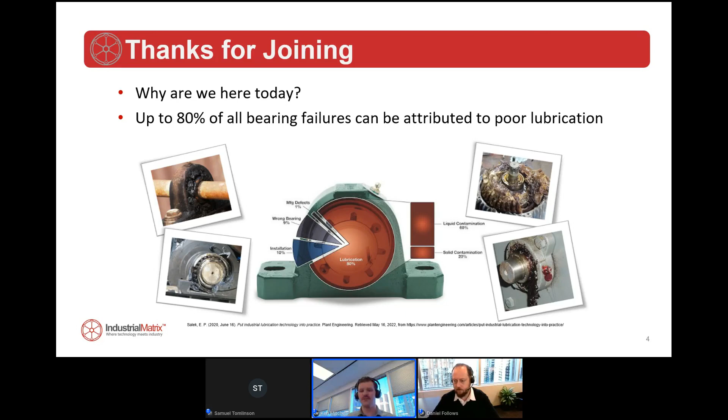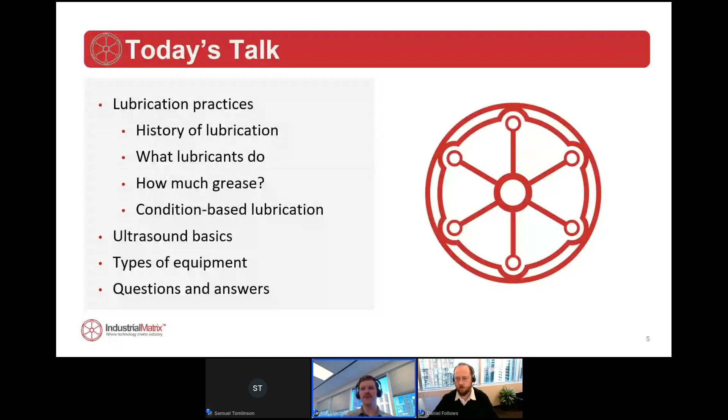So for today's agenda, I'm going to start by talking about lubrication practices. We'll take you through a brief history of lubrication, what lubricants do, and how much grease goes into a bearing - that's the age-old question. Then we'll build on that and get into condition-based lubrication, where we can really justify how much grease we're putting into a bearing. We'll tie that in with ultrasonics, because that is a very important and critical technology for diagnosing and analyzing how much grease should be in a bearing. Then I'll get into some types of equipment, just to paint the picture of what's out there and how the industry is accelerating and growing the options we now have to grease based on condition. Finally, we'll end with questions and answers.

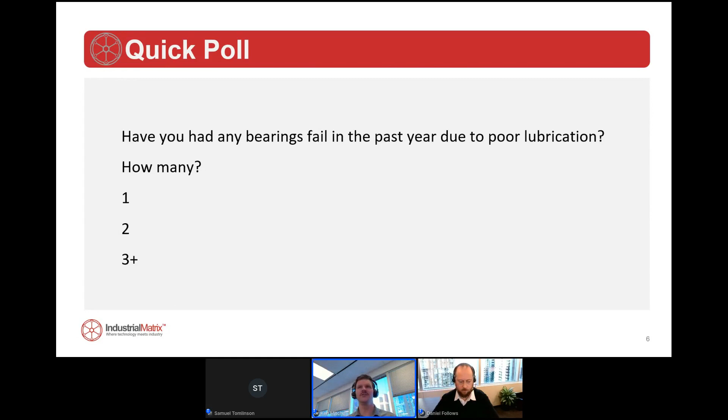So lubrication practices - again, we'll go over a history of lubrication, what lubricants do, how much grease goes into a bearing, and finally condition-based lubrication.

I want to start with a question, and I always like to tie this into an analogy and tell a little bit of a story. So my question for everyone is, how much water should you drink in a day? Well, experts say we should drink anywhere from 6 to 8 glasses each day. Now, those needs can change. What if we're outside on a humid 90-degree day, or 30 degrees Celsius, running a marathon? How about if we're sitting at our desk like we are now, attending a webinar? The point is, bearings are like us - their needs change depending on their environment and their workload. The harder they work, the more they need, just like our bodies and how we nourish ourselves. So keep that in mind as we go through this.

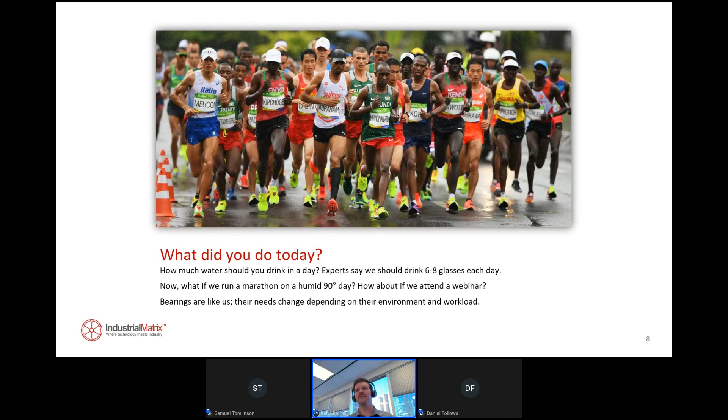Let's start with lubrication practices. Rewind the clock many, many years ago - BC, 17th century - the Egyptians got out there and started to build pyramids and structures. They realized that if they put stones on their sleds and slid them, it was really hard, so they needed a friction modifier. And they utilized olive oil - they'd pour that under their sled and could slide it along.

And that was really the first instance of lubrication that we had in our world, where we could use some type of a medium to really reduce friction, dissipate heat, reduce wear. Fast forward about 3 centuries, and the ancient Romans started to use animal fat to lubricate the chariot axles. If they didn't, they would heat up and fail.

They also realized that they could spin a lot quicker. Now, fast forward many years later into the 1850s and into the 1920s, petroleum oils are developed, and they really become the industry standard. Somewhere around the 70s, we started to get into synthetic lubricants, which is kind of where we live right now.

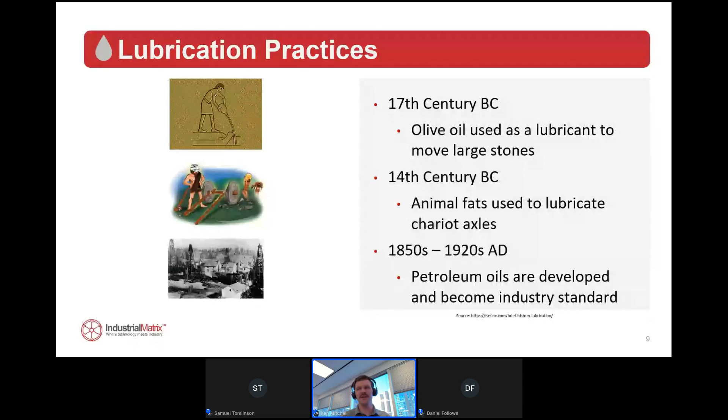But we've been increasing on this, and the whole goal is to dissipate that heat and to really fight friction and reduce wear. So that is the 3 things that lubricants are designed to do, as well as prevent corrosion through the addition of additives.

So what is grease comprised of? We have 3 basic compounds: a base oil, a thickener, and an additive. And what happens is, as we replenish grease into a rolling element bearing, we're going to start to use up that thickener. The base oil is going to deteriorate. The additives are going to be consumed.

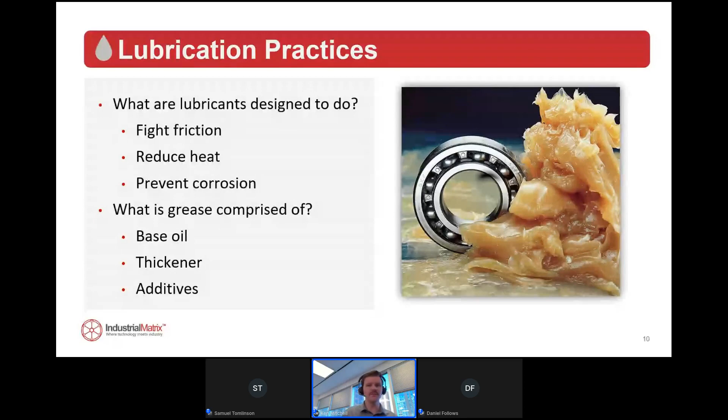So we need to regenerate that process on a set schedule. And then the question becomes, well, how much grease and when do we do that? That's really what we're going to get into. So to start with everything, if we have the best equipment out there, we grease based on condition, we're giving the bearing the right amount of grease that it needs, those things don't overcome bad lubrication practices. So we really need to start there as we build out a lubrication program and ensure that we're doing precision lubrication.

It starts with storage. When we get that lubricant in, where are we putting it? Is it sitting in an open drum off to the side of a lube room, maybe with the cap off, where we can start to get those contaminants in there? And then when we go out to our equipment, are we picking the right grease? Are we ensuring that if we're greasing a bearing, that that's meeting the OEM specs or the conditions that we're running that equipment under, if we need a high temp grease or a lithium based grease?

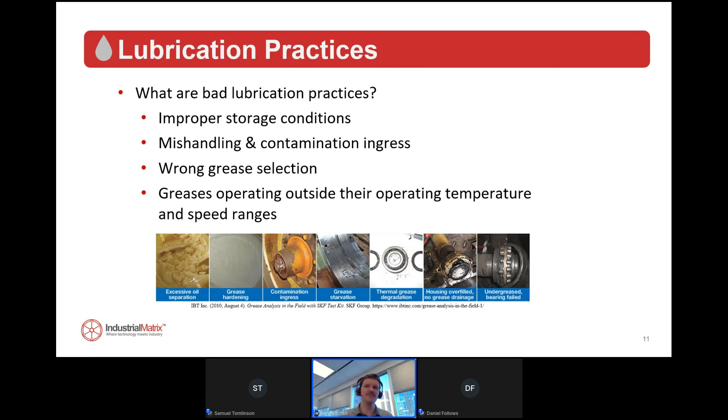And then finally, when grease operates outside their operating temperature and speed ranges, when we put too much strain on grease, it can't stand up to the job. So we really need to start by making sure that we're storing our grease properly, we're handling it properly, and then we're putting the right grease under the right conditions into our bearings. No matter how much we hone in and how much on condition based lubrication we get into, this is really where it starts, is proper handling.

So let's take you through a bearing. Well, what happens when we undergrease a bearing? That's pretty straightforward. We've all kind of been out there. We walk by a bearing, we can hear it rattling around. Yeah, that probably needs grease. It's getting due for that. Probably doing damage at that point in time.

But inevitably, when a bearing runs dry on grease, we're going to start to use up that thickener, that base oil, and that's going to result in metal on metal contact. It's also going to degrade the grease.

Now, just as bad as undergreasing a bearing, overgreasing a bearing can be almost as bad in some instances. When we overgrease a bearing, we're adding more heat, more friction. That bearing has to work a lot harder to fight through that grease and really do its job and rotate. We can also start to damage seals, introduce foreign contaminants, increase power consumption. These are all bad things that we don't want to do.

A good analogy I like to use is you're in the ocean on vacation and you're walking through the water and the water's up to your shoulders. It's really hard to get through that water. Now, as you get closer to shoreline and say that water's just up to your knees, you can just kind of skip right out. Think of a rolling element bearing the same way.

If we fill that up, that bearing's got to fill right up to the shoulders or right up to the top of that cavity. That bearing's got to work a lot harder to fight through it. Whereas if we just put the right amount of grease in there, that bearing can spin along smoothly and dissipate that heat and treat that metal.

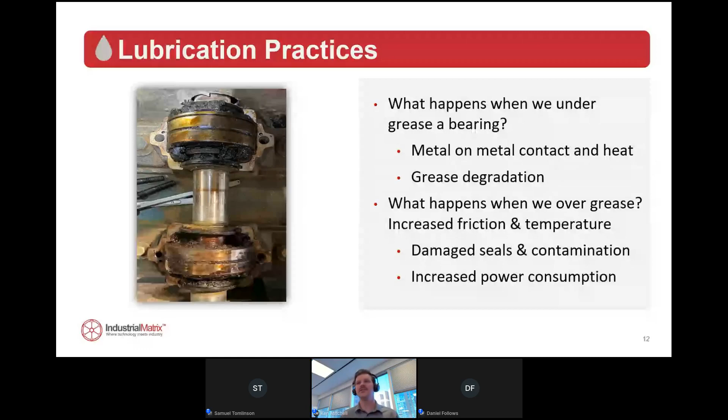So lubrication practices. Heard this before. How much grease do you put in that bearing? As I go into a plant or plants that I've worked in before, they say we give it 6 pumps every 3 weeks, or we give it 5 pumps every 4 weeks. So you really got to start to ask questions.

Well, what grease gun are you using? Because 6 pumps in one gun might not be 6 pumps in another gun. What if you have lubers on there, so on and so forth? How much is the output of that grease gun? Have you ever really checked it?

Are you using the same grease every time, or is the lube tech or the technician responsible for that grabbing one off the shelf and putting grease in because it's a bearing, any old grease will do, right?

Now, what if you're not running as much? If you've got downtime, or if you come through seasonal cycles, or what about if you're running in the summer when temperatures rise? Your grease consumption is going to pick up.

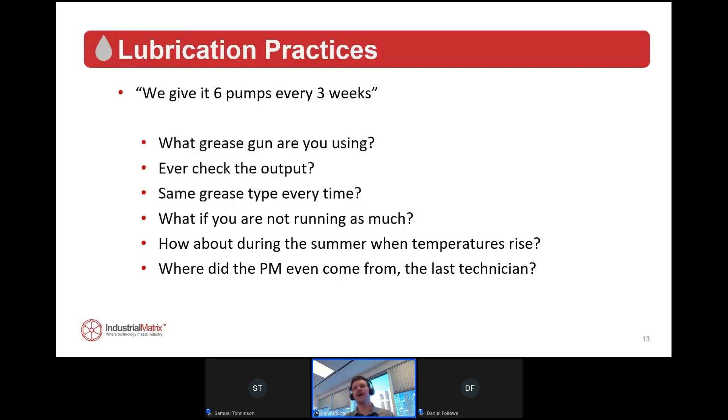And then finally, where did that PM even come from? Sometimes we go into the computer or we go to our PMs and say, okay, well, it's there, so it has to be right. We really need to start to question where we're getting this information from, and that's going to allow us to better grease our bearings.

So a couple more questions. Can we ever be 100% confident that we're adding just the right amount of grease? We know there's a sweet spot between under and over lubrication. And then how do we compensate for all these environmental conditions? Finally, what are the consequences of not adding the proper amount of grease?

Sure, the bearings aren't going to reach their L10 life, but that also contributes to reliability and uptime. A $300 bearing failing in the middle of the day might not be so expensive on the part, but what are the results of that?

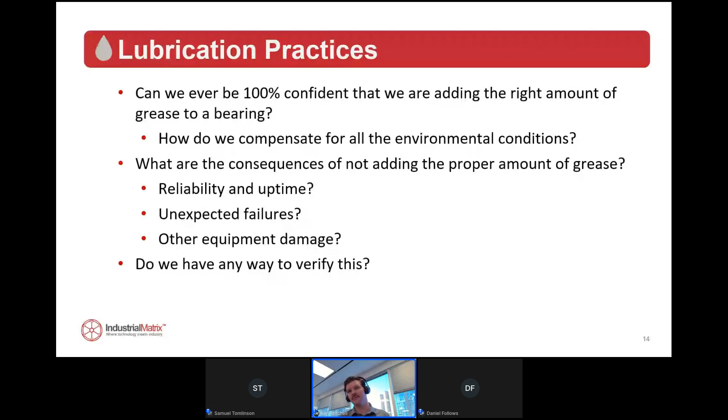Are we going to have downtime? Are we going to have to pull apart the machine? Is there going to be other equipment damage? Are we going to start to damage various other components? So we really want to have a way to verify how much grease we're putting in.

So back in the early 1900s, a gentleman by the name of Stribeck developed a curve known as the Stribeck curve. And this tells us the optimum lubrication status. Essentially what it is, is a point where friction is at its lowest coefficient. Outside of that ideal quantity, we start to increase friction, increase wear.

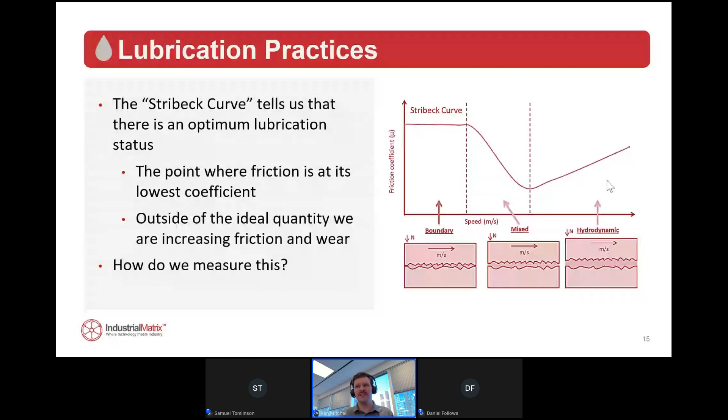And how do we measure this? How do we know that we're hitting that ideal spot every time when we go out to grease our bearings? Well, in the past, and for most OEMs, there's different calculators and formulas.

So SKF has a method. Based on the bearing dimensions, they'll tell you how much grease to put in the bearing, whether it's a side or an annular replenishment fill. And then the interval at which we grease a bearing, that can also be run through a calculator.

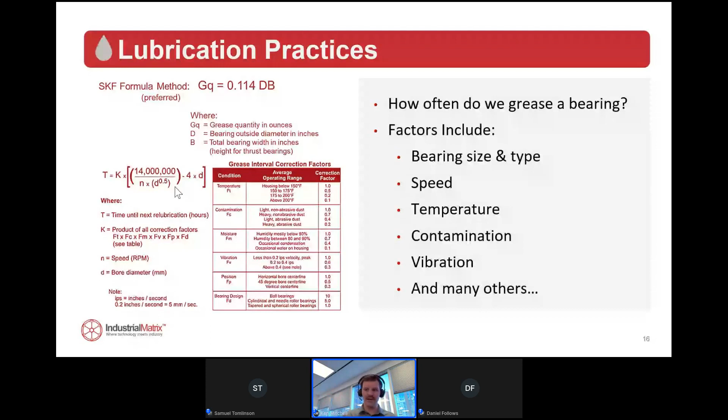Now, if we get one of those variables wrong, that's going to throw off the whole equation. So you can see it's not a fine science. We can't just take these numbers and start to spit them out and say, okay, we're going to grease that bearing every 2 or 3 weeks. We want a way to verify this and make sure that that bearing right here, right now, is getting the proper amount of grease. So what if we had the ability to do that?

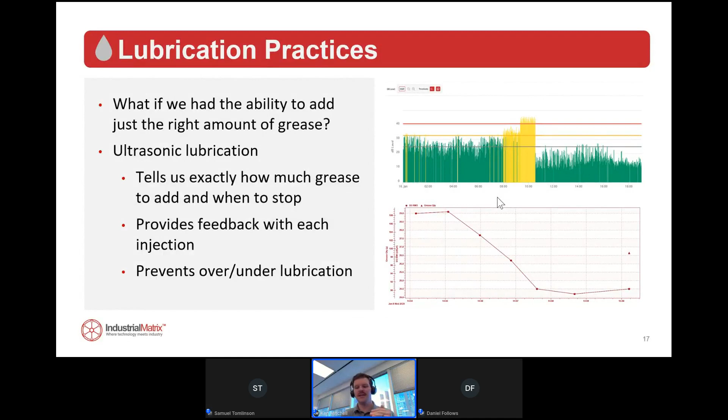So it greases, and that actually follows, if you notice from a few slides ago, that Stribeck curve, where we grease, go down, down, and as it starts to come back up, we're getting into that over lubrication status, or at least pushing our way towards there. We cut off lubrication. So this technology is really following what we've designed over 100 years ago and dictated as the lowest frictional coefficient.

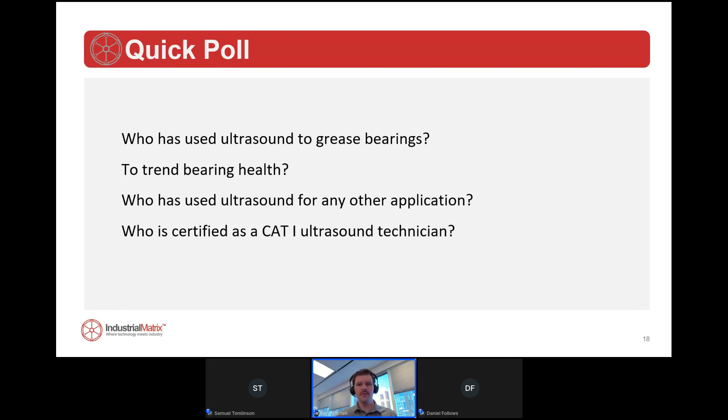Now, why ultrasound? Why do we want to use this technology? Ultrasound has quite a few benefits when we talk about monitoring assets. First of all, and we'll get a little bit more into it, the sound is very localized. Ultrasound working at this high frequency, the sound doesn't like to go out very far. We say it doesn't like to go out and play with others. It's very sensitive to small changes. It also gives us a perfect indication of what's going on with friction, also very repeatable, consistent, and some of the devices give us the ability to hear the injection.

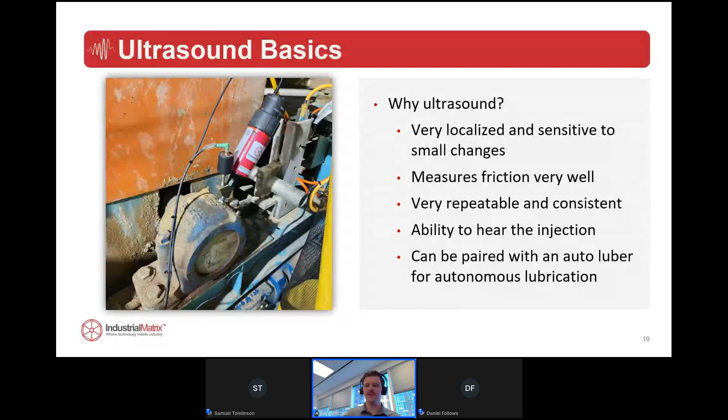So what happens when we grease with ultrasound? Again, we're measuring the frictional component, and we use a scale called decibel microvolt. When we add grease to a bearing, we're going to expect 3 things to happen. We want that feedback, so the dB levels going down is the first thing that can happen. Well, that's good, we're reducing friction. We're typically going to keep greasing until they rise back up again.

Or if the system's online, we're going to hit it with grease, expect to see those levels go down, and then come back up. Now, the second thing that could happen if we grease a bearing, the levels are going to go up right away. Well, in that case, we're going to stop because we know we're going in the opposite direction. We're increasing friction. We're not going to grease that bearing anymore, probably already in an overgrease status. And then finally, the third thing, what if the dB levels don't change? Well, there could be a lot of different factors. Maybe we're not adding enough grease to modify the friction level. The grease isn't getting to the bearing, our grease gun or our luber is empty, or another issue that's going on.

That is probably the most important thing we can get out of an ultrasonic system, because if we try to grease a bearing and we're not getting grease in there, we need to know that. Otherwise, what are the consequences? That bearing is going to run dry, metal on metal contact. It's going to fatigue the bearing and eventually fail prematurely.

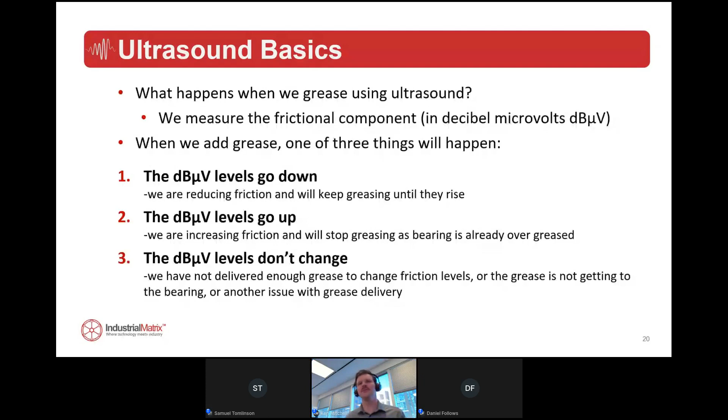So when we talk about ultrasound, where does it fit in? For those of us with experience in other condition monitoring techniques, if we've worked with vibration before, ultrasound really works in conjunction with other technologies, predominantly vibration. Where it fits in: looking at the screen, these are the 4 stages of bearing failure. As a bearing progresses through failure, it'll hit these different stages, and technology will tell us what's going on at each stage.

For stage 1, very high frequency - that's what we're going to detect with our ultrasound. Very minor subsurface defects on the bearing, and usually we can improve that with lubrication. So as that bearing starts to get loud acoustically, we can grease it back down. It doesn't mean the bearing's failing, it just means that bearing is in need of something.

Now, if we let that go, or if something happens to that bearing, we start to move into the progressive stages. Stage 2 is still high frequency, starting to appear in our acceleration and velocity technique. That's where if we pulled apart the bearing, we might see a little bit of damage or spalling in the race.

And then eventually the bearing's going to degrade even more if we leave it, getting into stage 3, stage 4. A good analogy I like to use is your car brakes. You're driving down the road one day, you hit the brakes, and you hear that very high pitched squeal. That's the early indication - your pad is worn down to a point where that little wear bar is touching the rotor, producing a very high frequency event. Now what happens if you leave that and don't replace your brakes?

Well, eventually you're going to get more pad wear down. You're going to get more metal on metal contact, and the frequency of that sound is going to start to come down in the audible range to a point where you get that metal on metal grinding - just this low rumbling sound. Same thing with our equipment: it's going to start at that high frequency squeal and then just come down in the audible range as the damage progresses.

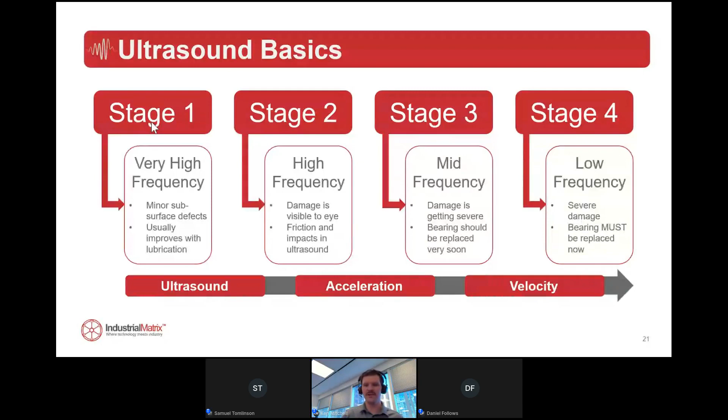If we look at the PF curve, I'm sure most people on the call are pretty familiar with the P-F curve. There's a lot of different iterations out there, but we really put ultrasound at the front. So after the installation and before the proactive domain, ultrasound fits in there because as a bearing starts to need lubrication, we can grease that out using ultrasound technology. It doesn't mean the bearing's starting to move into the failure curve - it just means the bearing's in need of something.

It also monitors the condition of a rolling element bearing. So if we're greasing a bearing, it goes up to a certain dB, we grease it back down. We go out next month or next week, or the online system picks up that it just keeps climbing - that's going to tell us the health of our bearing. So we use the tool twofold, as a technology for two different benefits where we can grease and monitor the condition.

Now, as we progress down the PF curve, this is where we pick it up in our vibration techniques. Going back to the last slide, we'll start to see a defect. If we find it in ultrasound, acceleration, velocity - eventually it'll start to create a heat signature. By the time a bearing creates a heat signature, it's getting pretty close to failure mode. And then eventually it becomes loose, your clearances go away, and then you do damage.

So you really want to deploy technology on the PF curve to find these defects before they become a real problem. If you're looking at stuff like heat, a lot of places will go out with a temp gun and shoot heat, but you're at the advanced stages of failure, almost in the failure domain, by the time you pick it up with heat. We say it's typical to discover a defect with ultrasound and then trend it to failure in vibration, heat, thermography, and other technologies, which is really true.

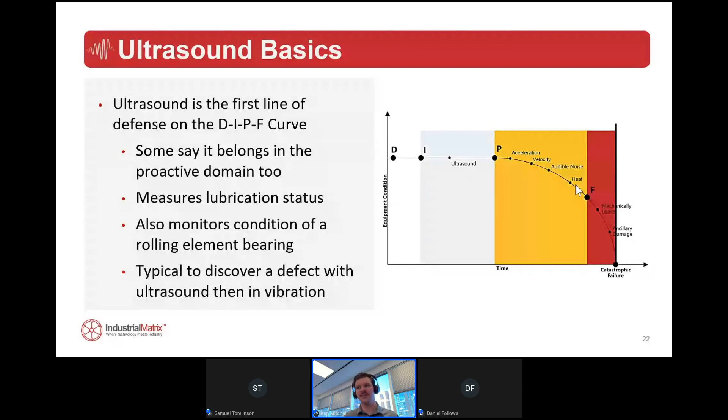It's that early indication and indicative of lubrication. So I'm going to talk a little bit about ultrasound. I won't get too in depth. For those of you interested, as you start to go down that road, I definitely encourage you to do your Cat 1 certification. This technology is becoming more and more beneficial outside of even what we're talking about today. But I'll give you a brief background and justify why we use ultrasound.

In our world there are 3 different types of sound. The first is infrasound, anything under 20 hertz, stuff we can't hear as humans but we can maybe feel. From there, 20 hertz up to about 20 kilohertz is the audible range, that's where we as humans live, breathe, hear. Now depending on your age, that 20 kilohertz starts to drop down, it can be down to 16 or 18. That's our entire environment. Anything above 20 kilohertz is considered ultrasound.

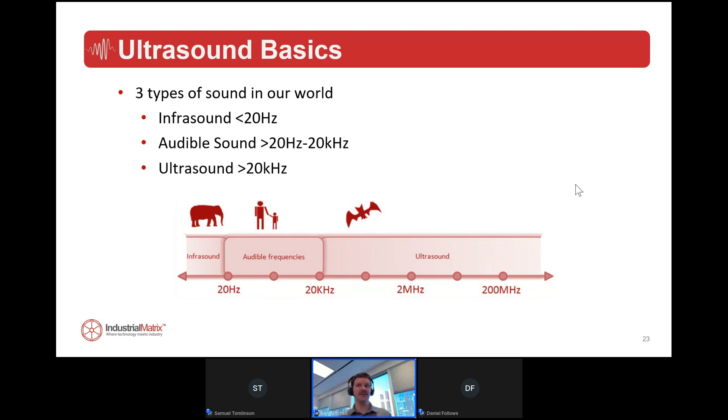So when we talk about these sensors, we're listening above that 20 kilohertz in the ultrasonic range. Ultrasound is produced by the vibration of molecules in any elastic medium, so that could be gas, liquid, or solid. It's airborne, structure-borne, it's all around us in that frequency range. We just can't hear it.

What we do with this technology is use the acronym FIT. If anything produces friction, impacting, or turbulence, we're going to detect it with ultrasound. When we talk about condition monitoring and lubrication, we're really looking at the friction and even the impacting, that's what the technology is going to tell us. But we can also use ultrasound outside of bearing health and lubrication.

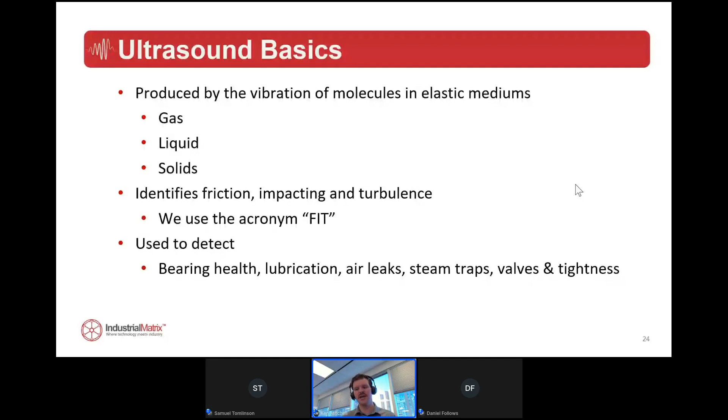It has been used for air leaks, steam trap monitoring, checking valves, and assessing tightness. That's where you can put a transmitter in an enclosure, seal it up, and actually scan around. If the sound gets out, then ingress can get in, meaning you're not completely airtight. So it's a very, very versatile technology, and it's really starting to progress in the past few years.

So what does sound do? Well, it travels as a wave, works over a wide range of frequencies. The behavior of the sound wave really does vary depending on the frequency. Sounds all around us can go through materials, reflect off them, and the amplitude increases or decreases with distance.

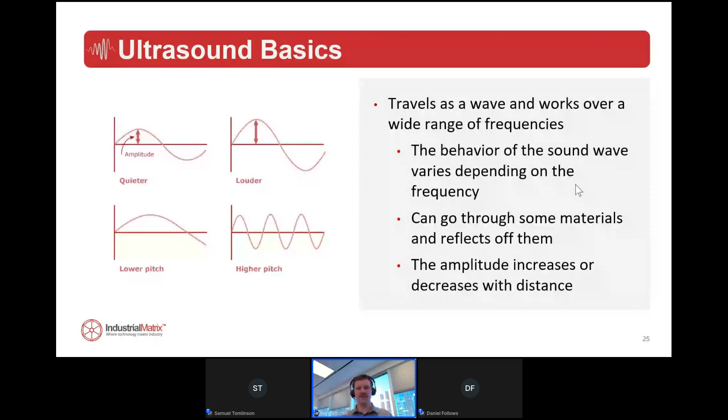If I'm speaking to you, if I'm 10 feet away or 3 meters away, and then I move up to 5 feet, so I halve the distance to 1.5 meters, I'm going to get twice as loud, my amplitude's going to pick up. Same as if I start to speak in a higher tone, the pitch gets closer together, those sound waves are going to come in closer. They're going to become more localized. So higher frequency means shorter wavelengths, lower frequency means longer wavelength.

Again, a good analogy - I always like to relate this to the real world. As far as music goes, you're sitting in your car at a stoplight with your windows up. The guy next to you, his windows are up too, and he's listening to his stereo at a very loud volume. In your vehicle, you're not going to be able to hear those high frequency notes, but you'll hear the low rumble, the bass, the boom boom boom.

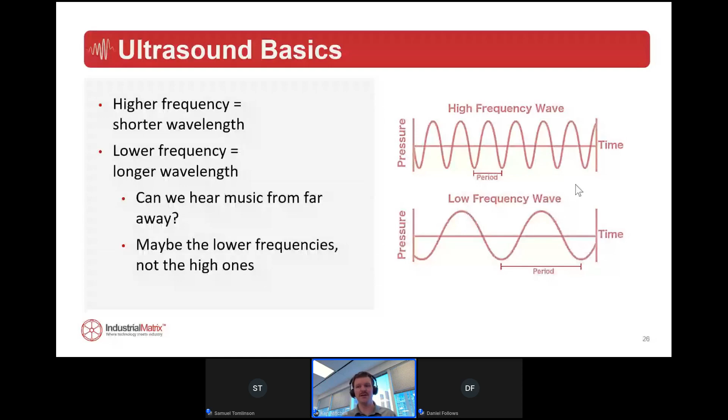The reason for that is lower frequencies travel a lot further. They can go through materials, they can disperse. The wavelength is a lot longer, so they can penetrate and have a lot more energy to travel further. Those high frequencies, though, become blocked out because as we move up in the frequency range, barriers can really block that noise, meaning it's far more localized. That's why if you blow a dog whistle in a room, if you're on the other side of the door, you might not be able to hear it, but if you start banging on a table at a low frequency, you'll probably be able to hear it.

How do we measure sound? Well, sound is measured in hertz, that's the international standard. For those of us in North America, we also use CPM, or cycles per minute. They're very interchangeable. So when we talk about sound, typically we talk in hertz, but when we get into vibration and diagnosing, we'll also relate to CPM. 1 hertz equals 60 CPM, just for those of us who need a conversion.

For comparison, my voice that I'm speaking at right now is around 100 hertz. What that means is the wavelength I'm propagating is about 11 feet in length. So there's a lot of difference in the wavelength as we move up in that frequency span.

What that equates to is when we take an ultrasound sensor, put it on a bearing, drill and tap it, magnetize it, epoxy it, we're only really measuring within about a 1 foot or 30 centimeter diameter. So unlike vibration, the signal is really unaffected by events further away. If there's something going on further down the machine or on the other side of the motor or the pillow block, the ultrasound's not necessarily going to pick it up as it reads that particular bearing. It's just going to focus on what's in front of it.

Again, a quick chart just to bring that point home. I said I'm speaking around 100 hertz of frequency, my wavelength is 11 feet. If I go lower, the wavelength gets a lot longer, and higher up in the frequency spectrum, all the way up to 38 kilohertz, it's only about 0.3 inches, so very small wavelengths.

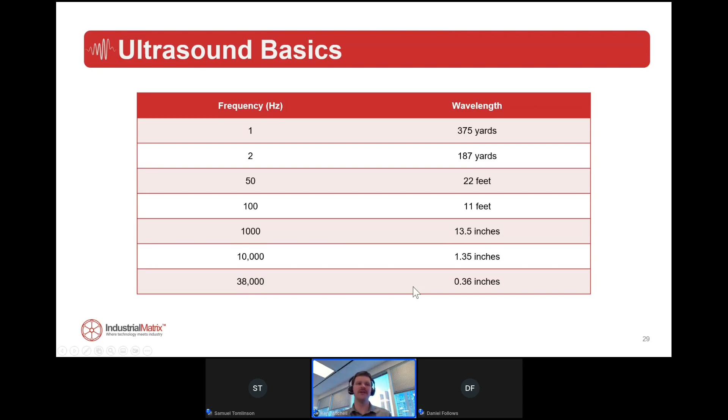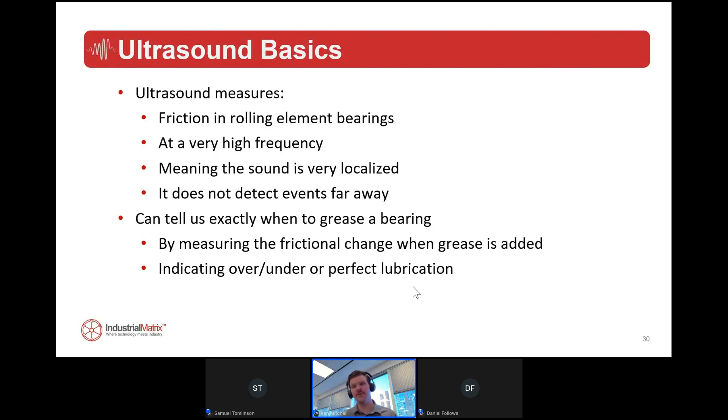So what does ultrasound do? It measures friction in a rolling element bearing, again at very high frequency, meaning the sound's very localized. Events far away, it's not going to detect well. What that's going to do for us is tell us exactly when to grease a bearing. We're measuring friction, and when we add grease, we're measuring that frictional coefficient, which indicates if we're under or over lubricating, or giving perfect lubrication to our bearing. That means we're giving our bearing that nourishment exactly when it needs it.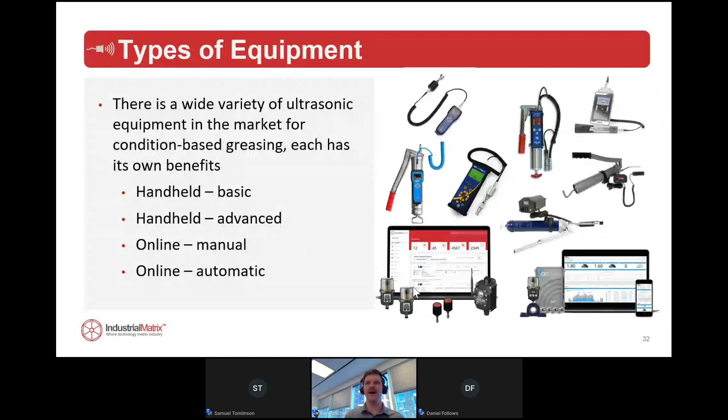To bring you back to the first slide, just to close off, I'm going to talk about some different types of equipment, to paint a good picture of what's out there, because there's a wide variety of ultrasonic equipment on the market for condition-based greasing. Each has its own tangible benefits and disadvantages. There are 4 different options: handheld basic, more advanced, online manual, and online automatic. Let's talk about some of the basic ultrasound equipment.

If you've ever seen a technician out there greasing with ultrasound, typically they strap it onto the grease gun. There's ones by SKF, SDT, UE, Sonophone, and some other manufacturers as well. What they typically do is work off-route. There's no software associated; what you see is what you get.

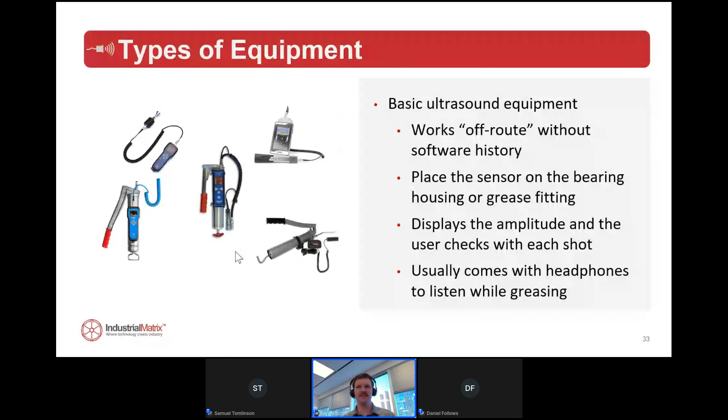As you put that sensor onto your bearing housing, or if it ties into a grease adapter, you can pick up the ultrasonic through there and put it on the grease fitting. It's going to display on the screen either a digital readout, or some have bars on them, and every time you add grease you're going to look at if the numbers go up or down. They usually come with headphones too, so you can listen to that bearing taking the grease as you put it in. So very basic, easy to use — open the box, take this equipment, go out, start greasing bearings with it, and you're going to justify what you're doing.

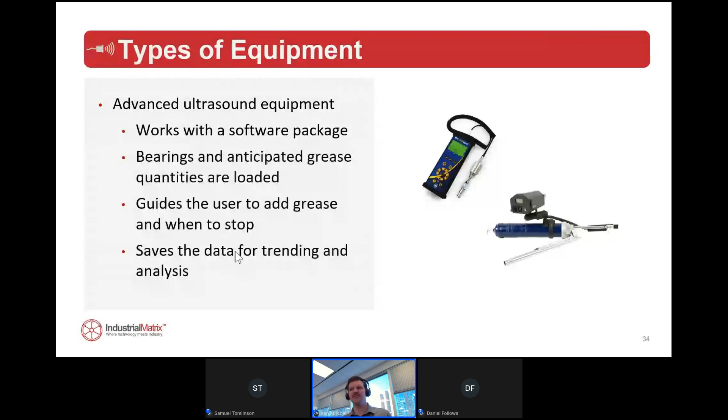Now we take that and build off it. There's some advanced ultrasound equipment. What this equipment does now is work with a software package. We can load in bearings, anticipate grease quantities that are loaded, and some will even guide the user when to grease and when to stop — it'll say grease, then tell them when they've had enough. All of this data is saved, and you can go back to the computer, plug it in, export it, and trend and analyze what you're doing with your bearings. So it takes the basic equipment and introduces the data logging or the ability to analyze what's going on.

And then finally, online systems. These are really the newest technology to come to market as far as ultrasonic lubrication goes. What they do is provide real-time monitoring. They're going to give you lubrication status and bearing health, and they'll communicate with auto lubers. So instead of the human intervention where you have to go out and visit that bearing with a portable ultrasound instrument, these will automatically grease, or they can trigger a manual lubrication, and they're going to give that bearing grease exactly when it needs it.

If you're doing a lube route with your ultrasound every 4 weeks, that bearing might get dry by the time you get out there. These type of systems will always be listening to the bearing and give it grease the exact second it needs. We say it's the first iteration of a bearing repairing itself.

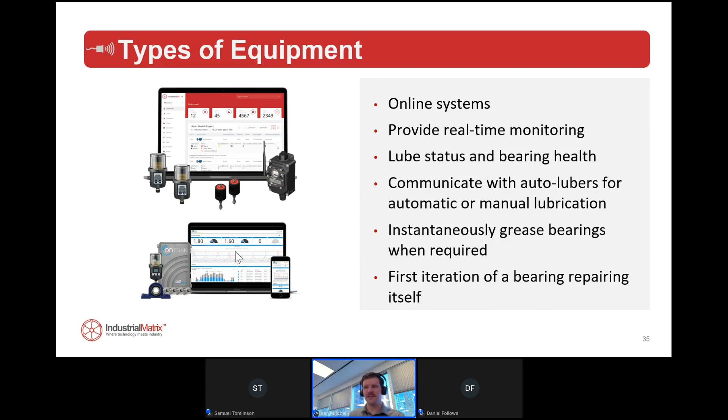Here at Industrial Matrix, our product line is called the LubeMatrix, and this is where we take the ultrasound and pair it up with an auto luber. We utilize radio communication for very high portability, and we'll dashboard that online with browser-based software. Once we set the system up, it is very autonomous. It's going to be greasing these bearings with or without human intervention.

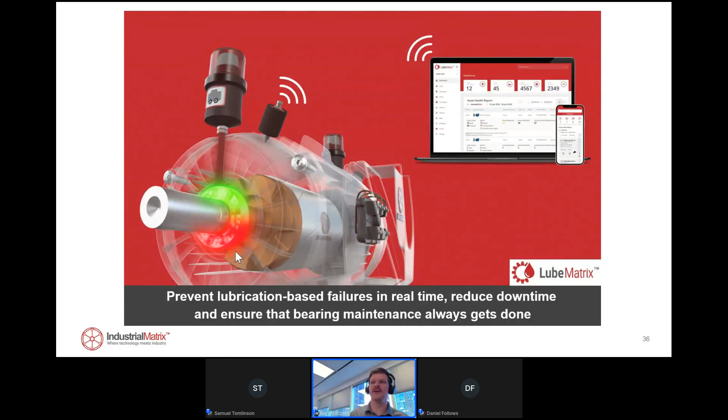All you really have to do is configure it, and then you'll check in on that bearing every so often. Now, how does it work? On the PF curve, we hit the ultrasound there. We have the sensors and the lubers installed, communicating via radio frequency up to the cloud.

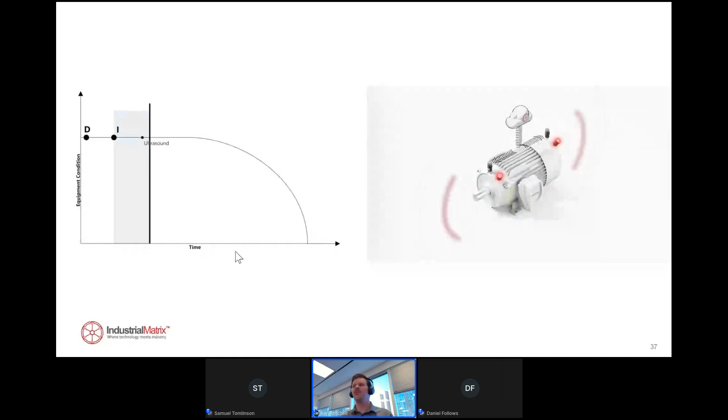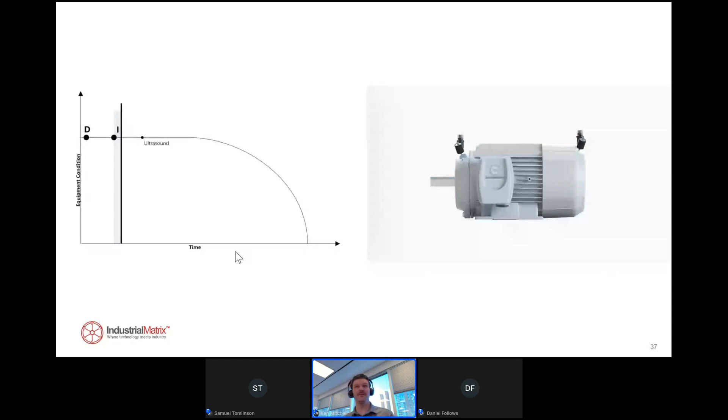When that bearing starts to run dry on grease after we've baselined it, it's going to call for lubrication. We're going to program and get that auto luber to fire, delivering enough grease to settle that bearing back down to baseline until the next episode. So if we're greasing a bearing every 4 weeks, for example, we might grease it every 3 or 4 days, but just a little amount every time that it needs it. That's really an early iteration of a bearing repairing itself.

So now we're starting to take the human factor out of it. We configure it, set it up with a baseline, and the luber's doing the work. We're also getting feedback in the system.

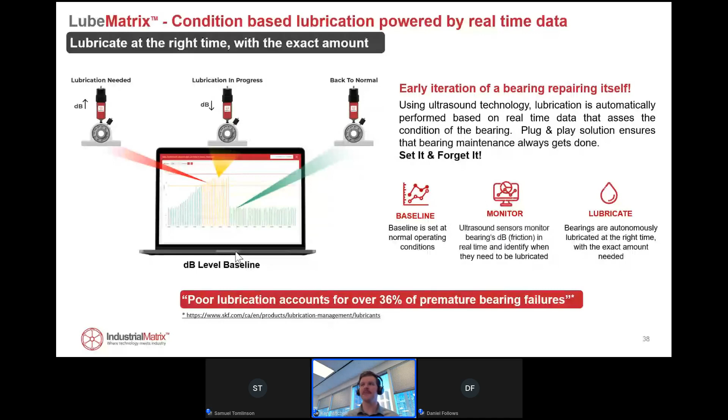So what are the benefits? Obviously the convenience, right? We don't have to go out, we don't have to grease bearings, we don't have to have a guy with a grease gun. It really is an ideal solution for remote, constricted assets, stuff that we can't necessarily get at, but the cost of failure is quite high. The cost of failure - we want to reduce downtime.

That's where we tie in precision lubrication. And then from there, we're going to help to create ROIs and show how this technology is going to help you reach that L10 of your bearing.

We can scale the system up as well. We can get up to 100 bearings on a single controller. Line of sight using radio frequency is really good - we're almost 10 kilometers line of sight. Realistically, it's going to be less as we get stuff in the way, but it's very far range, a lot better than Bluetooth or Wi-Fi in some instances.

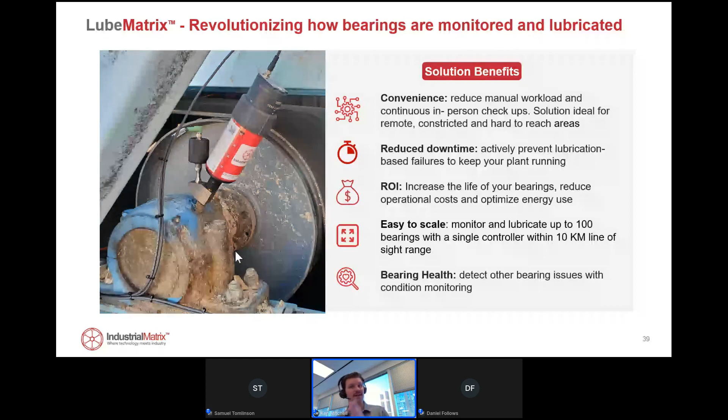And then finally, not only are we greasing, we're also trending bearing health as well. So when that bearing finally does start to fail, we're going to have indications for that.

What do we do as far as the LubeMatrix system? Well, we have two offerings. The first one is a single point lubricator. What we can do is tie two ultrasound sensors into one single radio. We also tie in two lubers. Very portable - we power the radio, and then this will send it back to the main controller.

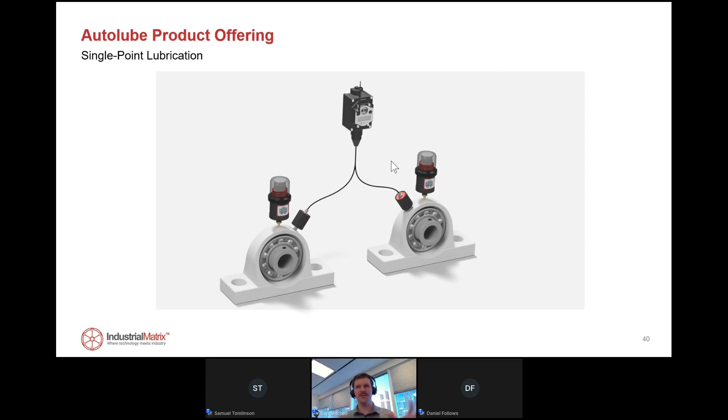So if we're in a plant and we want to monitor one pump down the way, and we want to monitor a fan up on the roof for the LubeMatrix, we have the ability to do that because we can modulize the system and move it around. It's not all hardwired back into one main system or one main box.

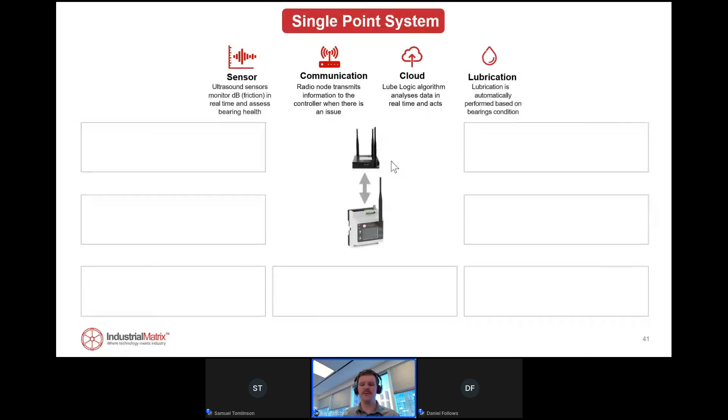What does the infrastructure look like? Well, we have a main receiver that connects to a Wi-Fi router with a global SIM card. So we use cellular to send it up to the cloud. That's going to come in a small enclosure. From there, we can get up to 50 radios on one controller.

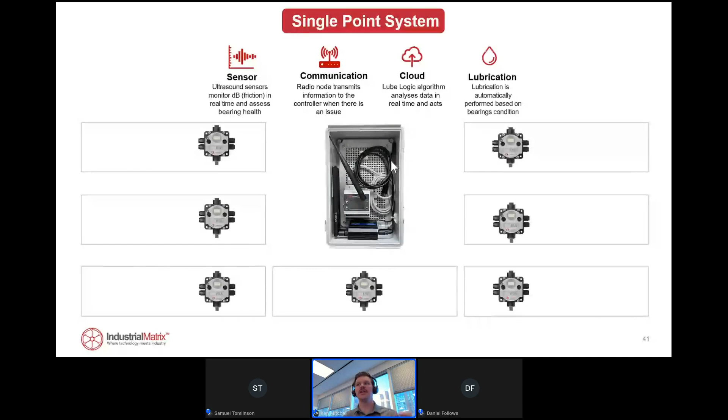If we go above that, we can just add another controller. And then each radio will speak to two ultrasound sensors and two lubers. And then finally, we can also tie into a multi-zone system.

I'll play this animation. Say we're listening to all four of these bearings with ultrasound. Just that second one from the left starts to rise up, indicating the need for lubrication. We can then install these brake valves that will open up, deliver lubrication to just that one bearing, settling it back down to baseline and not greasing all the other bearings in tandem.

Typically with a central lubrication or multi-zone lubrication system, it's just going to push grease blindly to these bearings. Now we can add some science behind it and make sure we're not over-greasing some, under-greasing others, because again, bearings' needs change depending on their workload and their demand.

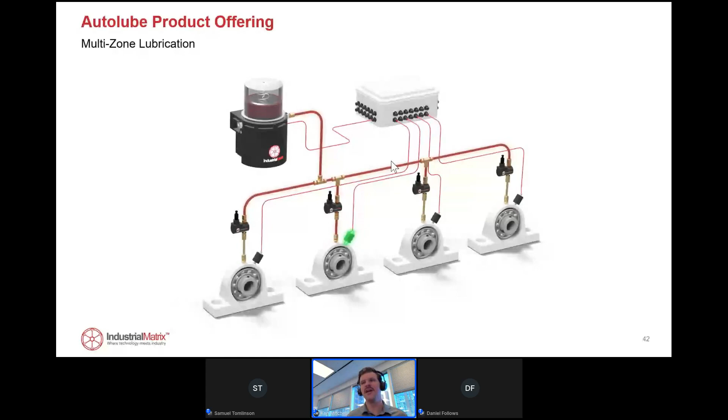So we take the LubeMatrix and marry it up with what we call our asset matrix. When we configure a system, we'll design an asset card for each particular piece of equipment that we're putting Lube Matrix on, and then we'll start to dashboard certain metrics.

We're obviously alarming around the bearing, so if that bearing moves into failure, we're going to get alarms. We're going to get warnings as well, and then even critical alarms.

And then we'll start to trend things like how much grease we put into that bearing, how many times we've lubed it, if we've had successful lubrication. Say we grease that bearing and it doesn't grease successfully, we'll return an unsuccessful lube and send a notification. So it really is full accountability.

As you can see on your screen, even little things like keeping track of how much grease is left in the luber. For anyone who's ever worked with auto lubers, they know that sometimes they run empty, nobody checks on them, and you have an empty auto luber sitting there for days, weeks, months. We're going to keep track of that.

When we fire grease into that bearing, we have the ability to feed back from that luber. So we tell the luber to grease that bearing based on condition, and then that luber sends a signal back saying it actually greased that bearing. So we know what's going on at all times with our bearings and with this system.

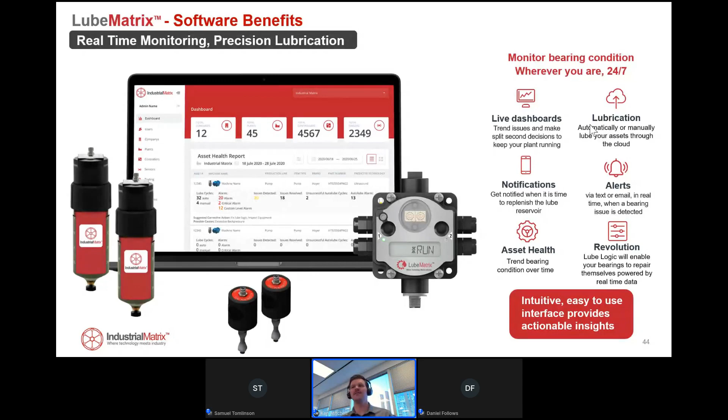Again, just another screenshot here. With the system, we do live dashboards. We'll send notifications, whether it be text, email, or even a daily report. And if anything goes into alarm or anything goes wrong, we're going to be notified pretty instantaneously.

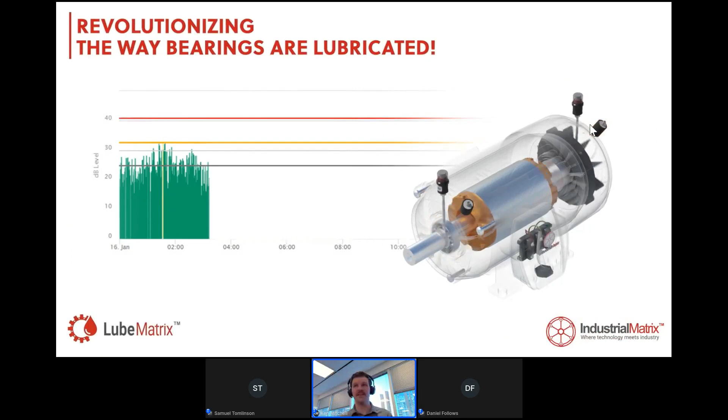Eventually the bearing is going to get loud, come up into the yellow zone, and you're going to see an A appear on the graph. That's going to indicate that it's been an alarm and the auto luber has fired.

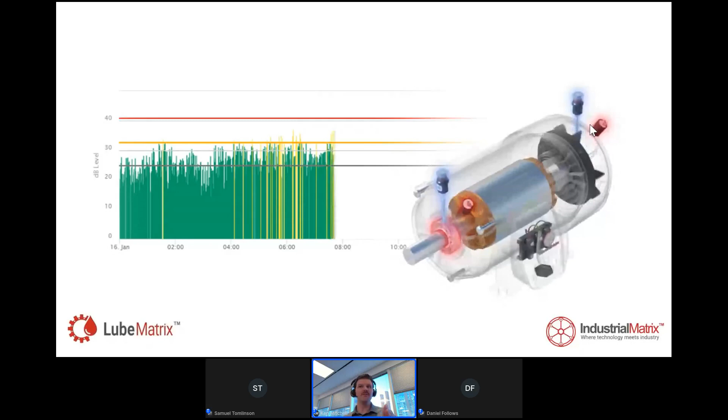Once that auto luber fires, what we're going to expect to see is that bearing come back down below baseline and run smooth again. Now, as long as that bearing is healthy, it's going to repeat that throughout the life cycle of the bearing.

Eventually, as it comes to the end of its L10 life and that bearing starts to fail, we're going to see those levels start to go up. Once we hit that red zone, we're going to know that bearing is moving into failure mode and it's time to start planning the replacement.

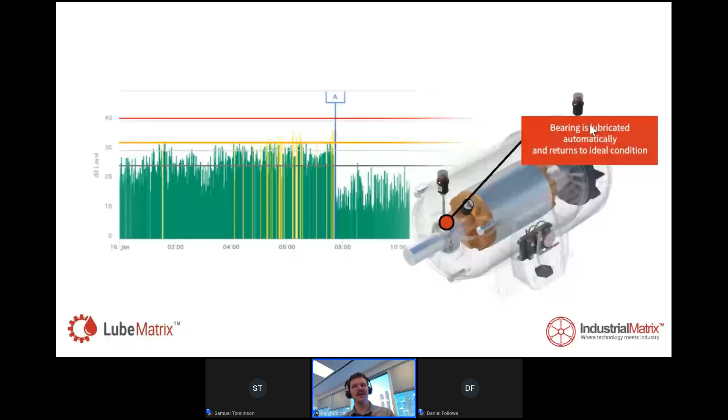Or if grease doesn't take, say we fire the grease in there and it doesn't settle down whatsoever, we'll lock up the lube or send a notification saying, okay, we tried to grease this bearing, we've calibrated it properly, and it didn't take any change, something's going on. That's going to let us go ahead and check it.

So to finally close off, I'm just going to talk a little bit about what we do here at Industrial Matrix and what our philosophy is. It really starts with our predictive maintenance platform and our Lube Matrix platform. That's again where we deploy wireless sensors, and they speak to the cloud.

We'll give you live dashboards and alerts when something goes into alarm, and that's going to allow us to take corrective action. In the case of Lube Matrix, when something moves up into alarm or warning level, that's going to allow the luber to take corrective action if the bearing's not in failure.

And we take that and marry it up with our AssetMatrix system. So we have the ability to do a plant survey where we can digitize all that asset data. If we're monitoring anything, that will already be done for you. That gives us the ability to know exactly what equipment we're installed on and what equipment's in our plants. We can then look for crossovers on motors, bearings, pumps, gearboxes.

We can also directly send RFQs to suppliers, and that's going to help reduce downtime as well. If we know what we're monitoring and the condition of it, and we marry those two together, that really starts to paint the picture.

Now, we realize that to go out and install a bunch of lubrication equipment in a plant, everyone has different abilities. So we want to make this successful, and that comes with our path to success.

So we get involved right away. Most of the equipment is plug and play, or we'll come on site and help do the install, the configuration, the tuning, make sure everything is set up. If you buy a bunch of equipment and it's never configured or installed properly, you're not going to get any value out of it. So we really want to make sure we help you with that value.

And then from there, we'll do a little bit of training. We won't do the full Cat 1 ultrasound program, but we'll make sure everyone who's bought into the program and who has a stake in it knows what's going on, how the technology is working, how it's set up, and what it's going to do for us.

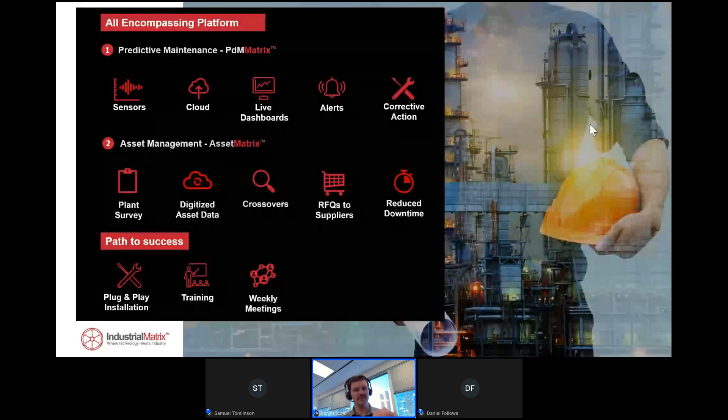From there, probably the most important value add is we'll do weekly meetings. We have a customer success team here at Industrial Matrix. Once we onboard and configure a system, we'll meet every week for 15, 20, 30 minutes, however long it takes. We'll go over the data and make sure everything's set up properly, that everyone knows what's going on. If something moves into alarm, we're going to work with you, being ultrasound and vibration certified analysts here on staff. So you're not doing this alone. You're not installing a system and just saying, I hope it works. No, you're getting that hand holding where we really get you to the finish line.

From there, the goal of any condition monitoring system is to create value. We're installing these assets and buying these devices so that we can go around and save assets from downtime. That is the ultimate goal of any predictive maintenance program. We want to work with you and create value. We want to show you what you were doing before might not be as good as what you're doing right now, and there's always going to be a dollar value associated with that. If you're having a particular bearing fail due to poor lubrication, we're going to show that if that bearing's lasting 2, 3, 4 years, now we're getting 5 or 6 out of it. That's value created there, and it's not going down in the middle of the day and causing a lot of chaos.

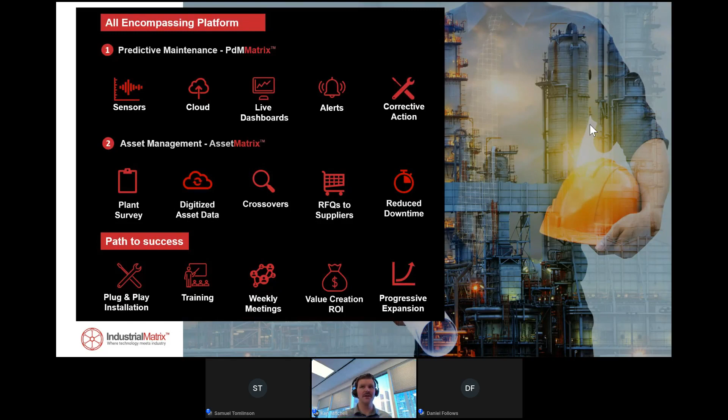And then finally, we want to expand. That really is the goal, is to get on more assets, really hone in on the PMs that you're currently doing at the plant. Finally, we can take an entire schematic of the plant, upload that into the software. We can color code each asset red, yellow, or green based on the current condition or lubrication status, visually giving a representation of what's going on in the plant.